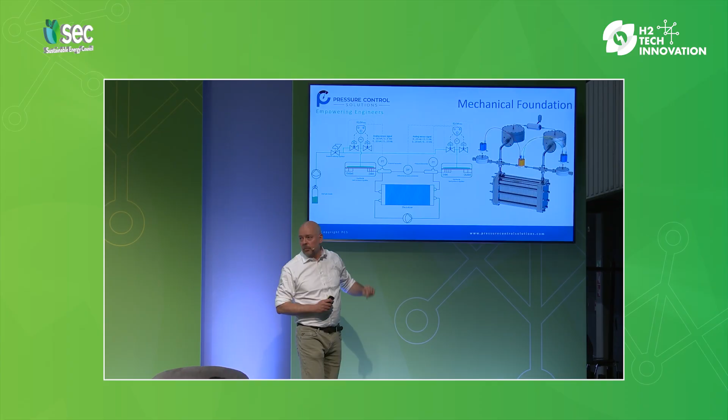So here I have to walk to the screen because I don't have a pointer, but on the left side you can see a very simplified P&ID. You probably recognize the electrolyzer itself over here. And you also see two tiny vessels, probably much bigger in your systems, and you see the pressure sensors on top of it. On each side of the electrolyzer, you will have a dome-loaded back pressure regulator.

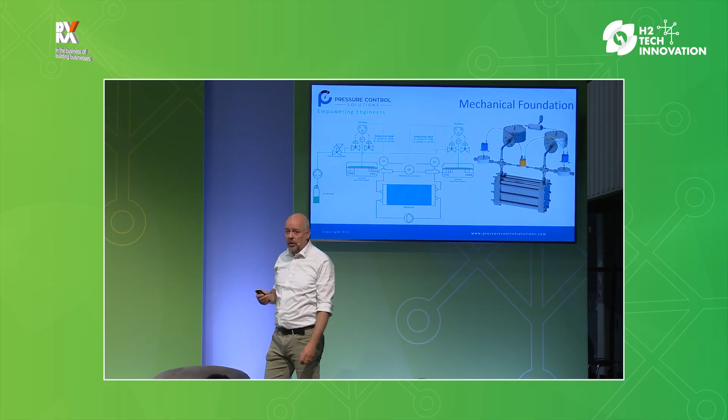This dome-loaded back pressure regulator was the reason I quit my job and started to represent this product, which is an Equilibar dome-loaded back pressure regulator, ideal for these kinds of applications because you need huge rangeability. You need to work on the hydrogen with maybe KOH in it. It needs to handle high flows at low pressures and sometimes low flows at high pressure. So you need a huge dynamic rangeability. And a single valve can handle a rangeability of 1 to 10,000, which is kind of amazing, but it works.

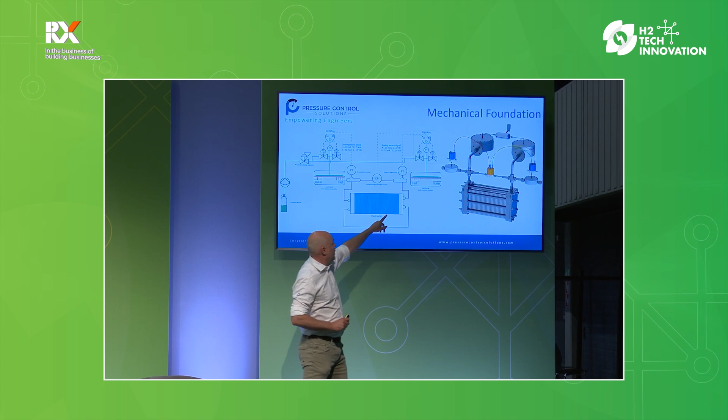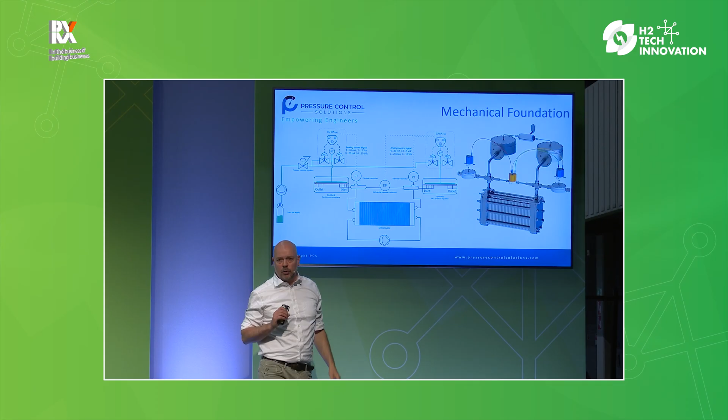So on each side of the electrolyzer, we have a dome-loaded regulator that you can see here, and a dome-loaded regulator for the oxygen side, and you will have a pilot controller, which is the one that we focused on, because the pressure upstream of this regulator is exactly the same as the pressure that you put on top of the diaphragm. We still have to compensate it for the last millibars, but it's got a 1-to-1 ratio. That's the most important thing to remember.

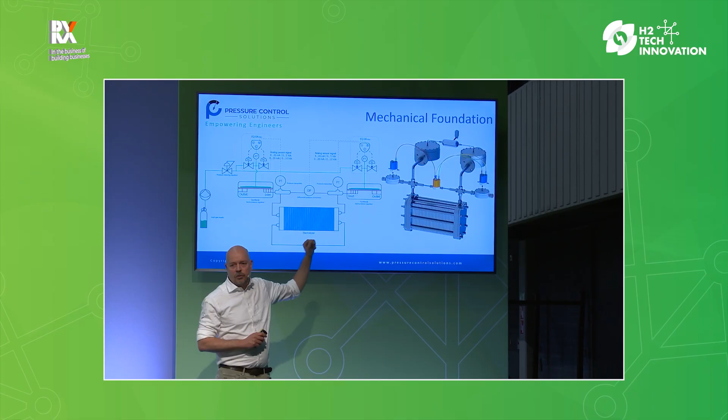In the middle, there's a delta P sensor, because we need to measure the delta P over the stack, and we control based on delta P. I've seen a lot of level control systems as well, but we found that delta P is much faster. And if we really want to be dynamic, we need a really fast delta P sensor, so we developed our own. The two blue boxes on the right in the P&ID are the EQDA, an electronic pilot pressure controller that is super precise and can control up to 70 bar with a precision of plus or minus 5 millibar.

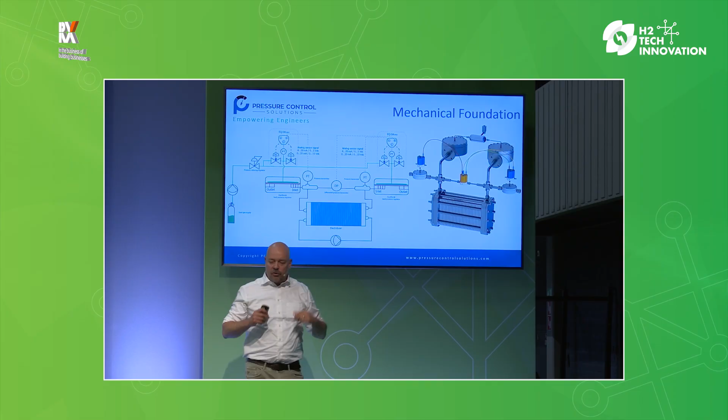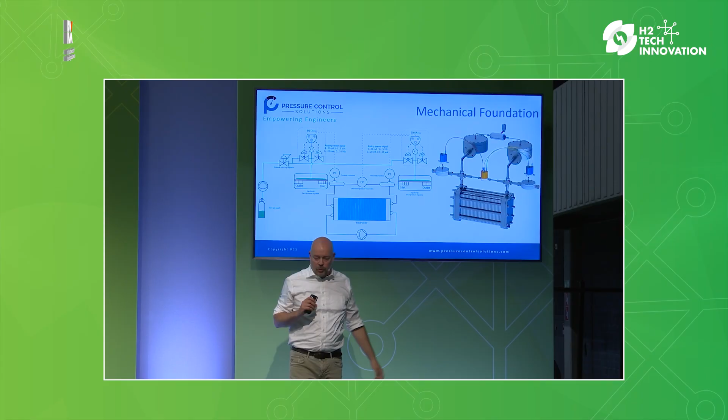In the back, you see very large valves designed by Equilibar for emergency shutdown. One of the critical things is that when you have no power, there is nothing to control. So if you have a complete power failure, you want to depressurize your electrolyzer and you still don't want to damage your stack. So Equilibar designed a valve that is purely mechanical, where a small vessel at the top is piloting the two regulators, and as soon as the power fails, the normally open valve will open and gradually decrease the pressure on both sides of the electrolyzer, staying within a bandwidth of 20, 30, 40 millibar.

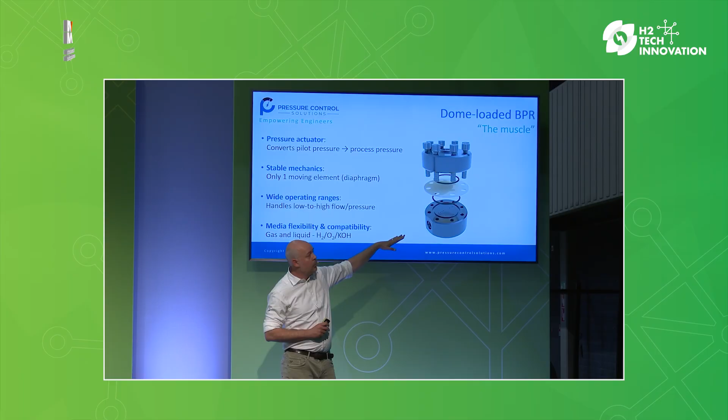Explaining the back pressure regulator in a bit more detail for the people who have never seen it. It's a pretty simple but brilliant design. If you can see the small holes here in the body, that's where the flow goes to the diaphragm. The diaphragm is closing the flow, and it's closed by the pressure that is put on top of that diaphragm. They are super robust. You can make them out of any material like stainless steel or Monel, and you can take a diaphragm from PEEK or also stainless steel.

And the nice thing is that you can increase the number of orifices so that you can scale this up to a CV of 160, for the people who it says something, but that's a regulator this size that can handle quite a lot of hydrogen.

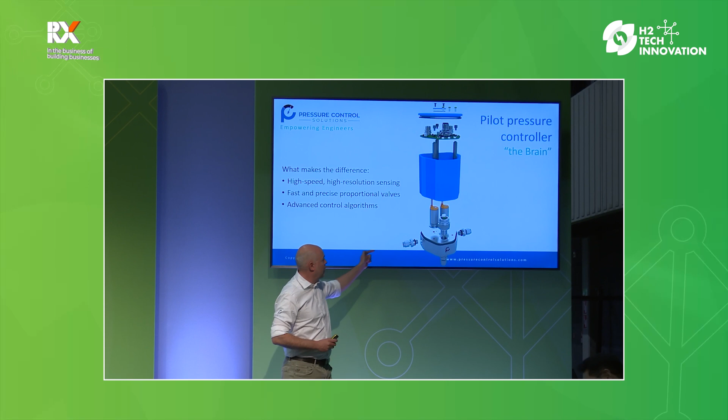Then the device that we have been working on for the last 6 years, which is the EQDA, the pilot controller setting the pilot pressure on top of that dome-loaded regulator. What we used is a very highly accurate pressure sensor that sits on top of a body. Flow goes in and we control the pressure on the outlet, which is the top of the diaphragm. Two proportional valves are controlling that, and we have a very fast PC board that is actuating the valves all the time.

This is the video where I do have to give a little bit of explanation, because on the complete left side of this, you see a graph, and that is going to be the stack pressure. So I hope you can see it. It's a 100-inch screen, I've been told, but so we are running the stack now at 0.2 bar. And what you see here is a set point for the stack pressure. What you see here is the control pressure by our device.

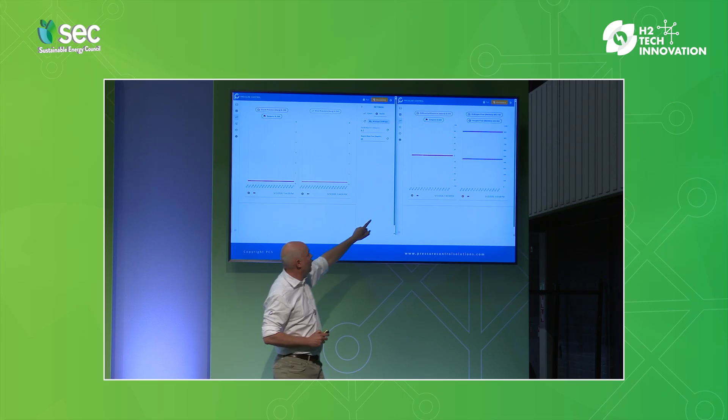And what you can see here on the right is the delta P. So we are now controlling within a bandwidth of 0.3 millibar. So not 300 millibar, but 0.3 millibar, and this is a setup that can run up to 10 bar. When we change the set point, and that is going to happen right now, then you can see that there's a pressure increase with a slope function now of 60 seconds.

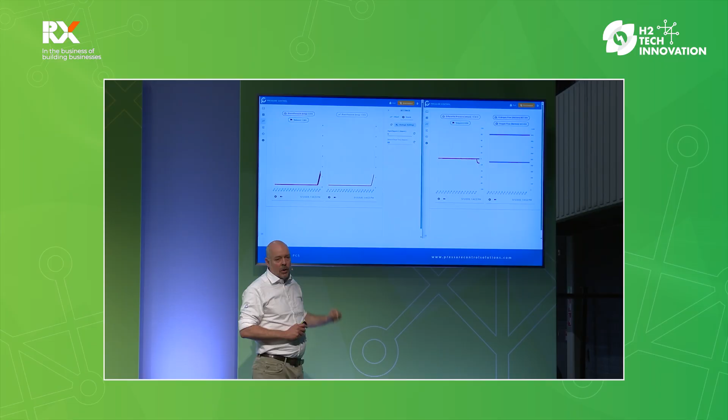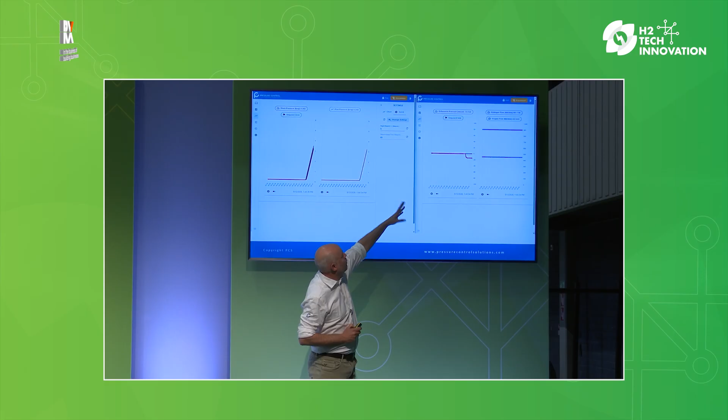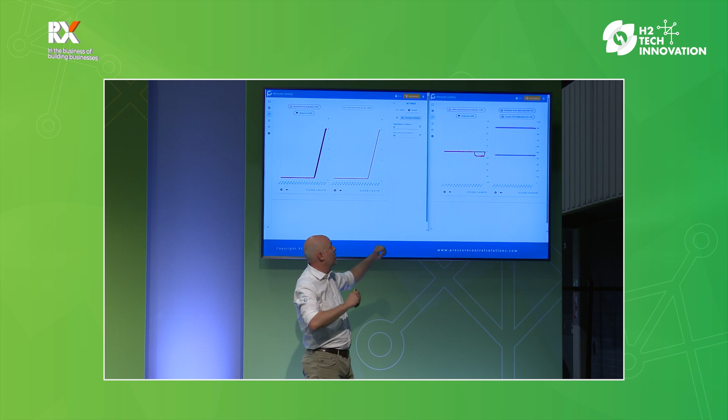So in 60 seconds, we go from 0 to 10 bar. So in 1 minute to 10 bar, or in 3 minutes to 30 bar, while we stay within a delta pressure of, in this case, minus 13 millibar. And as soon as we hit, what you can see is now that there is an offset, so we are actually tracking with the delta P control in closed loop, we are tracking the stack pressure. And as soon as we hit the pressure at 10 bar, you will see that the delta pressure becomes 0 again. So we are again within the bandwidth.

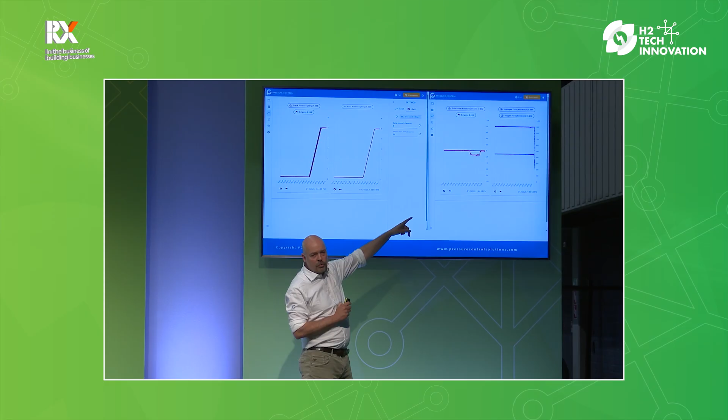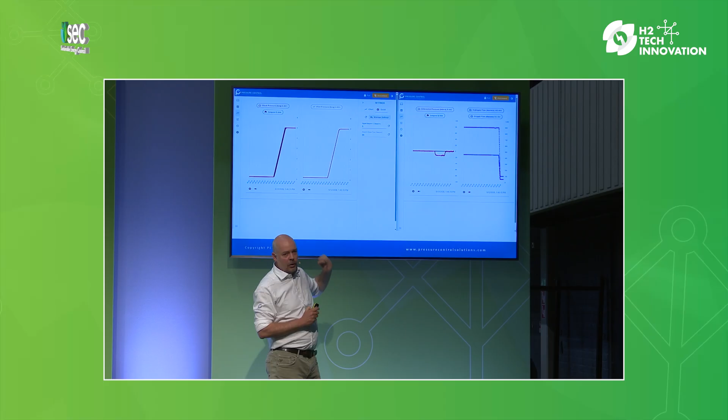Now we are going to change the load. So on the right side, you will see the hydrogen flow and the oxygen flow, and we drop this now from 90% to 10%. And there is almost no influence on the actual stack pressure. So you can see that the controller has to work, but it is still within 1 millibar. And if you scaled it up to 70 bar, it would be 7 millibar bandwidth. So now we increase the load again to 90% and still no influence on the delta P control because we close the loop really, really fast.

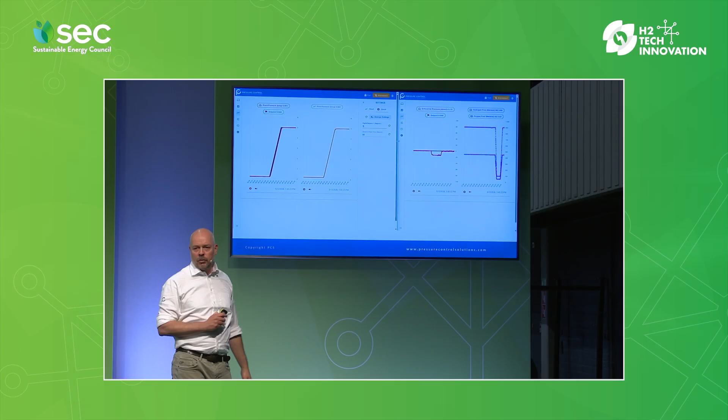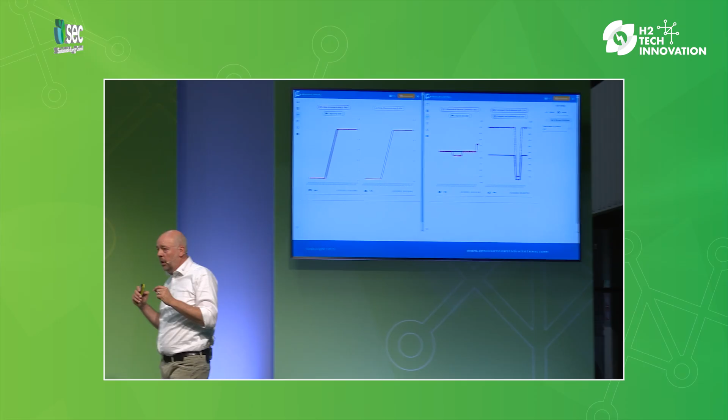Obviously, we also need to go down in pressure at a certain point. First we are going to change the delta P because we have now set it to 0 millibar, but you can also change that and give a set point up for 25 millibar or down as we just did. And you can see that it responds really quickly, so you can actually preset the delta P over your stack.

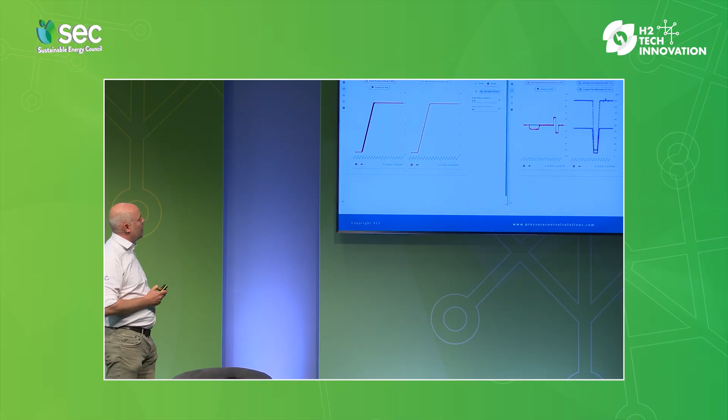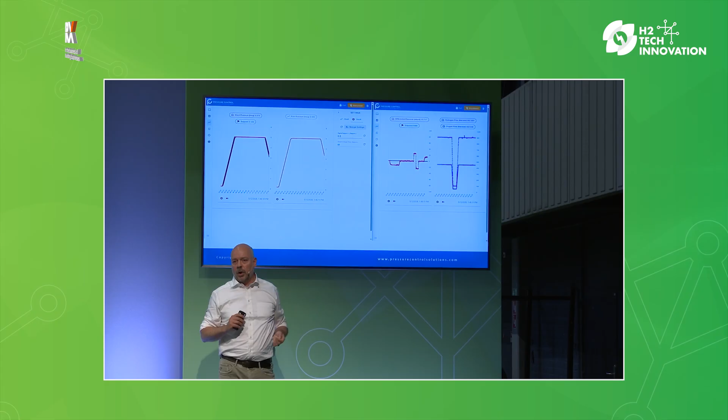As soon as we are back at 0, we are going to decrease the pressure to 0.2 bar. And we do that at the moment again with 60 seconds. So in 60 seconds, we will go from 10 bar to 0. And the interesting thing, what you see is that the delta P is now tracking it again, and now we have an overpressure on the hydrogen side of 13 millibar. But as you just have seen, we could have set a set point of minus 13 and be just exactly spot on 0 millibar.

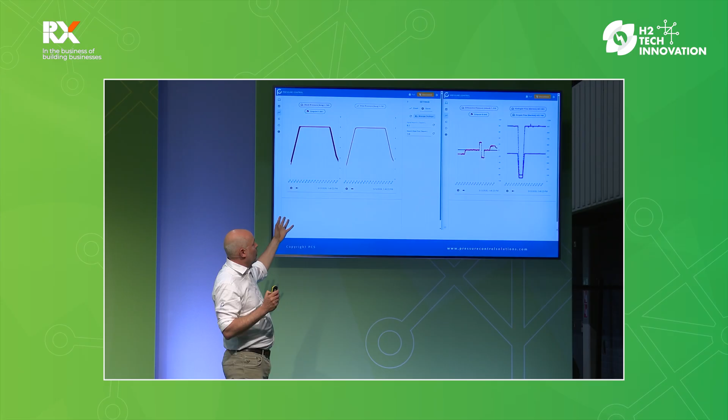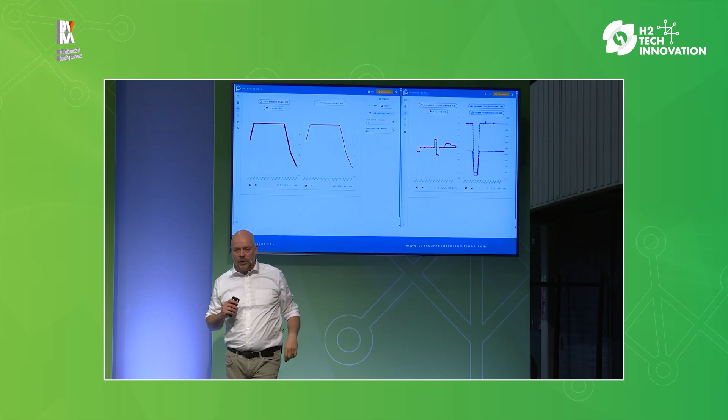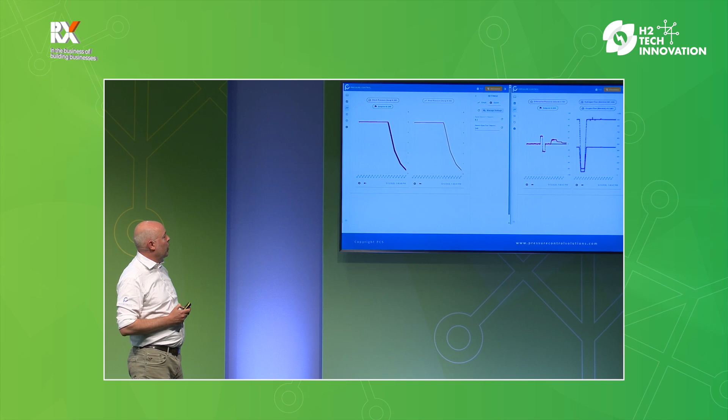How aggressive you set this, you can choose that. It's now set at 120 seconds, and if you double the time that you take to decrease the pressure, then you have half of the difference between the set point and the measured value. We can do that again, and now we are at 3 millibar controlling, and now we have 240 seconds. And as soon as we hit 0.2 again, we will be stable, so the red line on this side will drop again, and we are controlling at 0 millibar. So there we go.

This was my demonstration. This is my video. We have this live demo. We have it on our booth. So if you want to see it, then this is the booth number in Hall 2, F58. We have the design engineer over there. If you have any super critical questions you want to ask them, that's also possible.